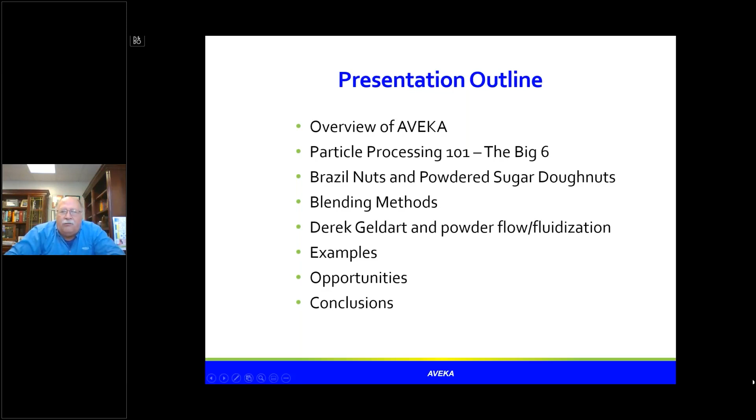So just a short overview about AVEKA. If you don't know, we are a particle technology company focused on contract manufacturing. We spun off from 3M in 1994, and we are comprised of 5 separate companies with 290 employees, and we do just about anything from food to chemicals to cosmetics and lots of stuff in between and beyond.

Since we are a particle processing company, we are always focused on different ways of doing particle processing and understanding particle processing. And I call these the big six. There's probably a big 36, but just for this talk, things that we all are interested in in particle processing range anywhere from how do we characterize it to how do we agglomerate something to how we do size reduction. But today, I'm going to be focusing on the blending part of the big six.

And if you look at the pictures that I have there, one of the pictures is a picture of gunpowder up in the upper left-hand corner. And that's clearly a blending process, but it's also a blending and an agglomeration process. So something as simple or perhaps as complicated as gunpowder uses blending to get the final product, and without the blending you wouldn't have a product at all.

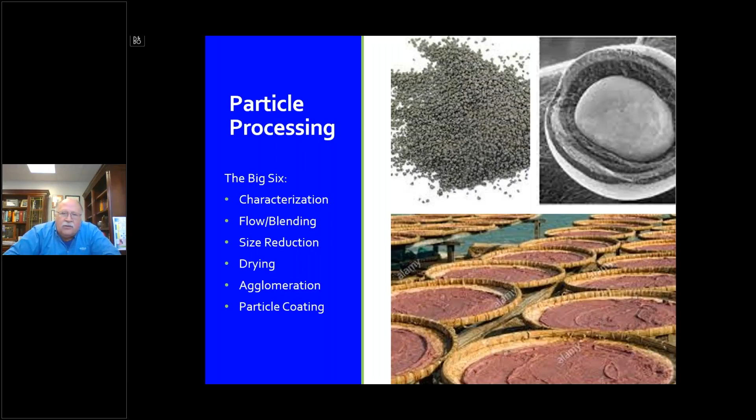Now, this is quite surprising because your first intuition would say that that big particle would sink to the bottom, at least if the density and the like was the same in fluids as it is in particles. But in fact, we can go to a lot of trouble to blend particles together, and after we've blended them and they're moved across the country or used in your factory, you can actually have your good blending process fall apart, and you can end up with those big particles on top. And so one of the issues that we're always thinking about when we're blending is how to avoid this Brazil nut effect.

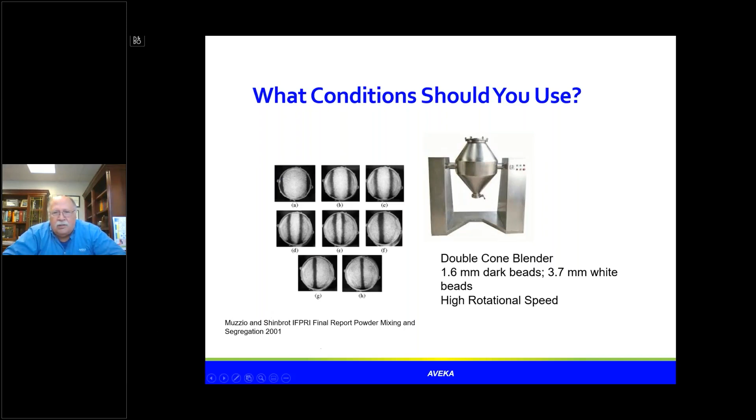His paper dealt with a lot of why this happened and the theory and the calculations. But for us that are practitioners, the important part is just that this can actually happen. So changing the blending conditions can be an incredible factor on this. I'm not going to give you all the answers today. I'm probably hardly going to give you any answers today, but being aware that you can change your conditions, whether it's the rotational speed or the type of blender that you have or the type of materials or the time or the intensity, all can make a big effect. And we need to actually pay attention to this as we're going through and doing blending.

And I'm actually going to show you one example where one of the challenges was we had a blending process that ended up with a lot of microbial growth. It wasn't with a bread sample, and I swear to God, if you ever see bread that's turning blue, run away from it. But this idea that things can happen in there that you wouldn't think about is always important to be thinking about.

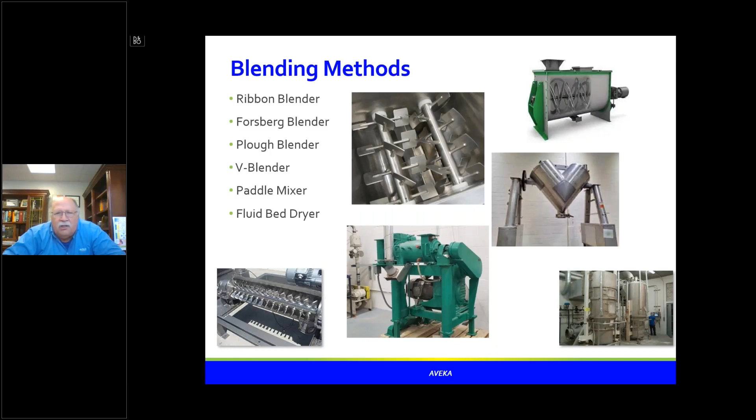This is an example of a plow mixer, where instead of having ribbons in here, you have plows that move the material around. Here's an example of a paddle mixer. And I've even put a fluid bed coater dryer in here as a mixer, because I'll actually show you an example later on. And these are great methods for doing blending. There's tons and tons of others. Let me give you a few of these others, because these would be what I would call really different blenders. And we'll talk about some of these later on.

So this is a picture of a spray dryer, and here at AVEKA, there's many times that if we can dissolve materials together and spray them out, that's a great way of doing blending, because we're now calling on solution blending. It's a way of ending up with a dry powder blend, just a slightly different way. I'm going to talk a little bit about a magnetically assisted blending process that I was involved in inventing when I was at 3M many years ago.

Those of you might recognize the Resodyn acoustic blending system from a lab standpoint. These are incredibly great mixers. This is an example of a centrifugal mixer. Commercially, it's called a FlackTek here in the United States. This is one of the better mixers for a lab mixer I've ever seen, and we'll talk about this a little bit at the end. Here's a tumble mixer where it actually has a spray bar in there. So basically almost like a clothes dryer where the particles are tumbling, and you can spray, or you can just use it as a mix.

And you know, to show you that for somebody like me who's been in this business for almost 36 years of doing particle processing in one way or the other, even an old dog can learn new tricks. And as I was getting prepared for this talk, I found this funnel mixing setup that I actually have listed as one of our examples. And we'll go through here how 3 simple funnels can be a great way for blending.

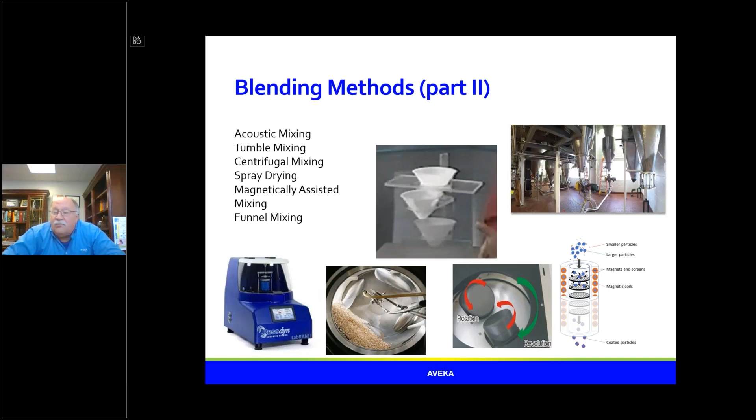And once again, I've given you some examples here of blending methods. What I haven't given you is the universe of blending, and I'm not even sure where you would go and find that. Some of the ways you just are going to have to take a look yourself, but these are some great starts. But the question that always comes up is, what blender is the best blender? What blender is the correct blender? A friend of mine that's part of IFPRI, Jeff Hoffman at Paul O. Abbe, has put together a list, and he's got a much more extensive list than what I've taken here.

So the answer is you can probably use all of these for low density blending, but you sure as heck wouldn't try to put metals into a ribbon blender, because you'd probably break it. I mean, they just don't move. The other thing that Jeff talks about is, so you've got a blender. How can you get the maximum capacity out of a blending? Because at the end of the day, you want to get it in, you want to get it out, you want to get it mixed, and you want to get on.

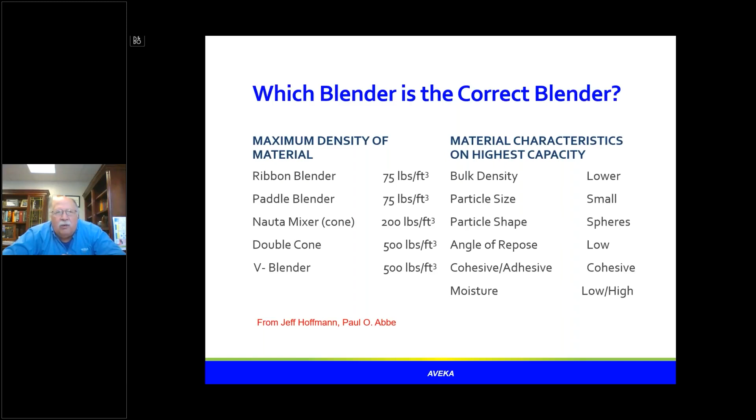Now, picking that blender, having that opportunity to pick that blender, that's usually something that we all have the opportunity to do when we're building a brand new facility. But most of us are faced with the processing dilemmas of what do you have? So I call this the available equipment dilemma. If what you have in your lab or what you have in your production plant is a ribbon blender, guess what? That's the best blender that you can possibly use because it's going to be the one that's available to you. By the same token, if you have a scalability issue and you have a ribbon blender in your lab, but you need to get to a high volume, maybe the ribbon blender isn't going to work.

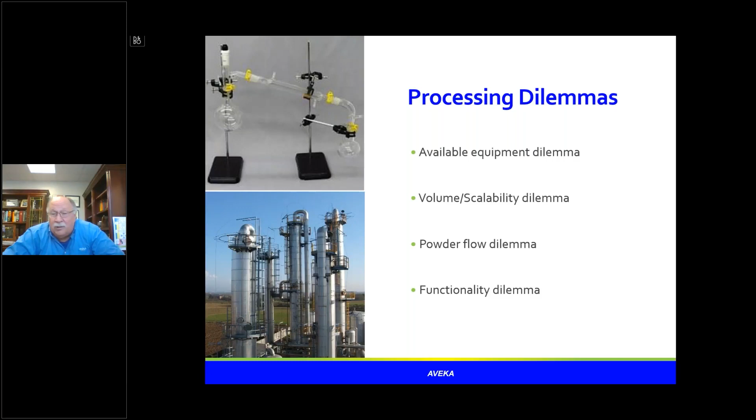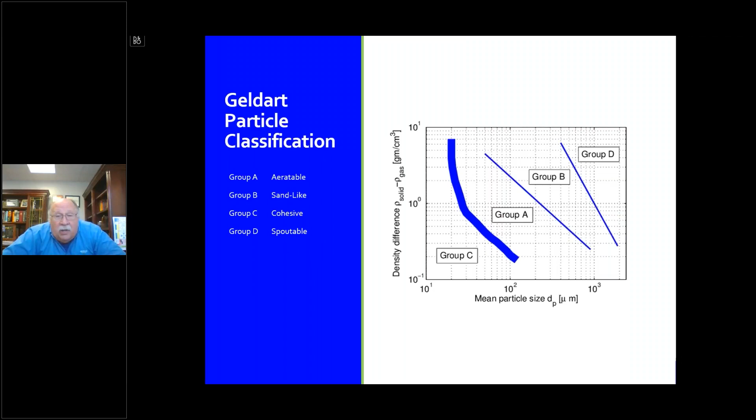The problem particles that we all worry about are group C particles, and this is an area that we're almost all working on. The particles that seem to flow the best are these group A and group B particles, and then group D particles, they're just big particles that sometimes can have challenges in moving because they're so big. But you will need to know whether you are working in that cohesive range or you're working in that granular range, and are they flowable, because it will have a tremendous effect on how well your blending actually goes. So blah, blah, blah. Let's actually look at the examples and see what we've found out about particle processing.

What I'm going to talk today about from the example standpoint is I'm going to talk about the standard blendings, and these are pretty boring, but they're interesting to talk about from a why did we pick what we picked. I'm going to talk about a blending gone way bad and why it went way bad. I'm going to talk about some clever and unique solutions. Not all of these are things that we've done here. A couple of them, the trituration and the funnel flow, these are examples from other people, but most of them are things that we've done here. What I'm going to do in each one of these examples is I want to talk about what is it that we are trying to do?

What is it that we need? How did we approach the problem? And why did we pick a particular blending method? Once again, this is not going to be an extensive list of every problem and way to approach a problem, but it's going to give all of us some ideas of what might be the best way to consider blending and how to approach it.

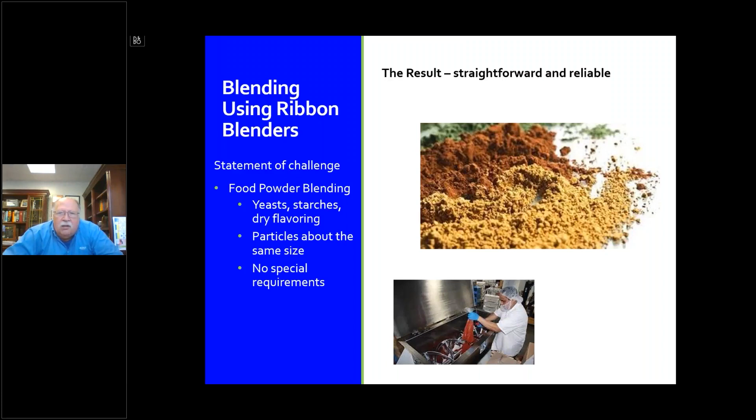I don't have a micronutrient in there. I don't have to add water. I'm just going to put it in. And in fact, the picture down here at the bottom shows somebody just standing over the blender, emptying a bag of powder into this ribbon blender, and he's going to put 4 or 5 more powders in there, and he's going to actually get a blend. Turn this on. The challenges on this thing are it's pretty straightforward.

We pick a time that might be anywhere from 5 minutes of blending to 20 minutes of blending. This is a pretty standard process for food materials at AVEKA. It's easy. We also do industrial materials, but in this example here, I'm just talking about food materials. The reality is that the biggest issues that we have on using these types of materials is getting the product into the system without making a dusty mess and making sure that the formulation is right.

And not because the formulation hasn't been designed to be right, but when you're taking lots of different materials, the reality of this is it's a mess because of how I'm putting it in, and did I get everything in there? Now, I would like to say that no one that's ever done blending in a manufacturing process has ever made a mistake in the formulation, but I think we know that that's wrong because it does happen. And no one has ever had a problem getting particles into a process without making a mess. And that would be wrong also.

We use some bag dump stations, and I think these are pretty standard. So, you can pick just about any blending process, but you're going to have to get that powder in and you're going to have to get it out. Typically, these aren't big problems. And if you have the right equipment and you really set up your formulation system right, I mean, this is protocol and process, it should be actually fairly easy for you.

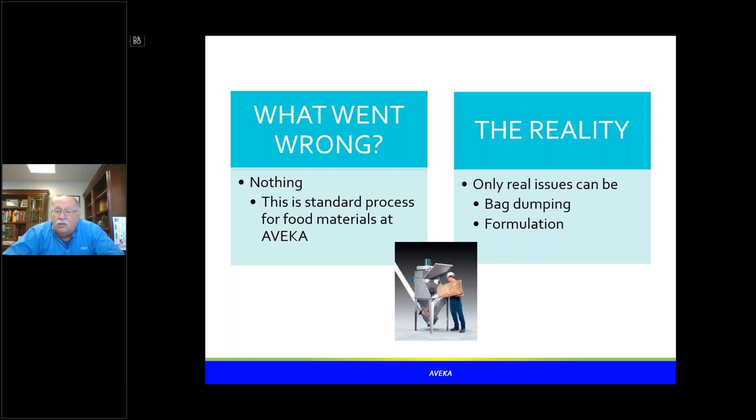So what happens is these paddles here are moving rapidly. You've got 2 sets of paddles. They intermesh very nicely. And if this is a continuous process, this is actually a batch process shown, the powder comes in at this end and the powder is moved down to this other end, and the powder leaves from the bottom in a continuous fashion. This is a type of process where you're going to set up on a big scale, 5,000 to 10,000 pounds. I mean, you can really get some large volumes through here. We love this process. This is a great process if you're doing big volumes.

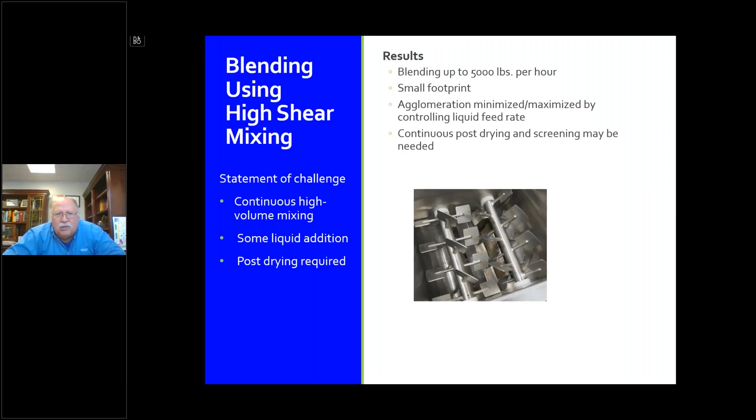Typically, a good example where something like this might be used is in the formation of granulated soap powders. This system will also do some agglomeration, but there's big volumes that have to have the right cost, and so we don't have time for loading up systems and unloading systems. It needs to be continuous. What went wrong with this system for us? We actually put this system in our plant and it works fine. We didn't have anything wrong, but just like the other process, we really have to be careful about how we're adding the materials, how we're handling before and after.

And if we are mixing with agglomeration, many times the yield might be only 60%. So there's a recirculation mode. Now that's not typically what we think about in blending, but if you start mixing blending and agglomeration and drying, you can actually have some issues where you're going to need to recirculate your materials and make sure you get everything done right. The third relatively easy process that we looked at was blending of a very dense material. It was a ceramic material.

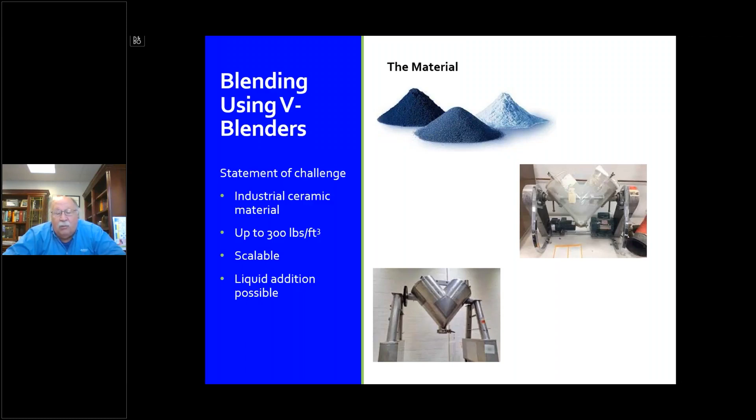Well, what went wrong? What can go wrong in a system like this? We have seen some cross contamination issues, and we've seen premature dumping issues. So once again, let's go back and take a look at this picture here. You're loading the product up here on the top, and typically you're unloading it at the bottom. There have been times that people haven't actually closed the bottom, and will end up dumping the material all over the place. That's a bad day for everybody.

How do we solve the issues? Because the blending is absolutely straightforward. It's really quite nice. How do we solve the issues? It's all about protocol training and PM maintenance. But that's just standard manufacturing operating procedures for everybody.

I think that this next example, blending gone bad, is really a unique and interesting story. So let's do the statement of the challenge here. I wanted to add a small amount of water to a dry food product. Now, I want to go from less than 1% up to 5% moisture. I'm going to use a ribbon blender. I'm going to use a spray atomization. I'm just showing here a ribbon blender, but we could have easily used a tumble coater because I wanted to show the spray atomization.

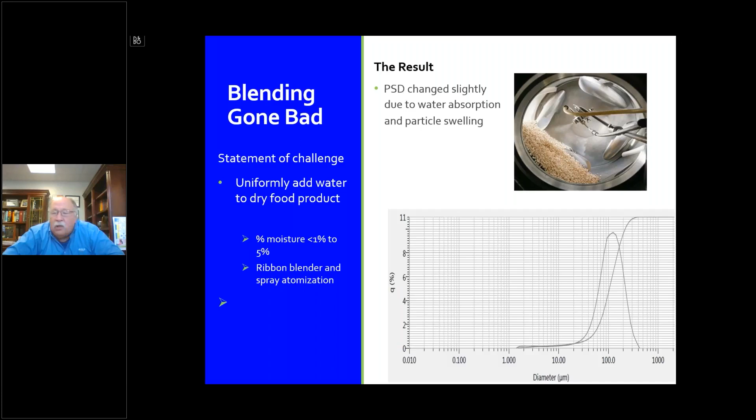The result is it worked out really well. The PSD changed slightly, just showing a particle size distribution. There apparently was just a little bit of water, the swelling of the particles. And as far as we could tell, we hit a home run the first time we ran this product. It worked perfectly, except what went wrong. So two parts to this one. The blending was easy. It was straightforward. The problem was everything went wrong. There was incredible microgrowth afterwards.

Now, if you're in the food business, you know that 5% moisture is not a bad thing to have. 5% moisture, you shouldn't have microgrowth. And in order for you to have microgrowth, you typically need three things. You need food. Well, we're working with food. You need water, which we just added to food, and you need a source of the microbes. Now, we didn't add enough water to cause a problem, and yet we had this problem.

So the first thing that we knew is that there had to be microbes either in the system to start with or added in the water. And we were actually able to easily prove that the water wasn't the problem. So the microbes must have been there, but they weren't growing at the low percent moisture. The question is why did they grow when we were still below what would be a reasonable number for moisture in the system? We believe, and this is probably absolutely true, the water wasn't uniformly distributed. There were wet spots that were higher than 5% moisture, but overall the sample was 5% moisture.

Now let's think about this. This is the classic issue in blending: is your product uniform when it comes out?

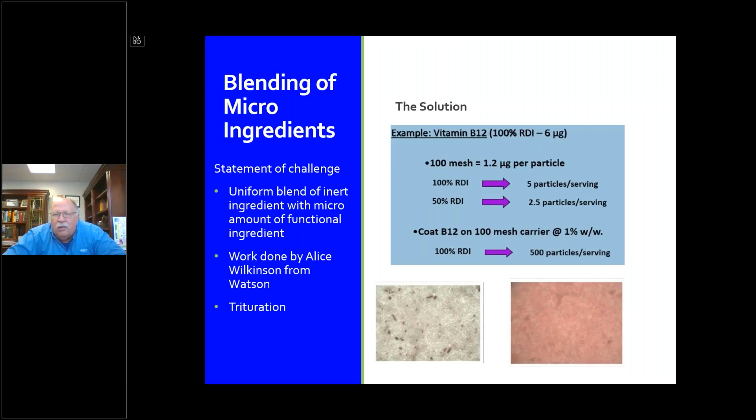So what Alice did, and I think this was brilliant, is what's called trituration. She actually dissolved the vitamin B12 and sprayed it on the surface, and you can see the difference between this nonuniform and this uniform blend. And this was done by a fluid bed or a spray drying process.

I consider that in this case, Watson and Alice Wilkinson came up with an incredibly brilliant solution to blending uniformity. They sidestepped this mixing challenge of micro ingredients by dissolving it and actually spreading it out and then drying the product. I don't know, is that cheating or is that brilliant? I would truly consider this brilliant.

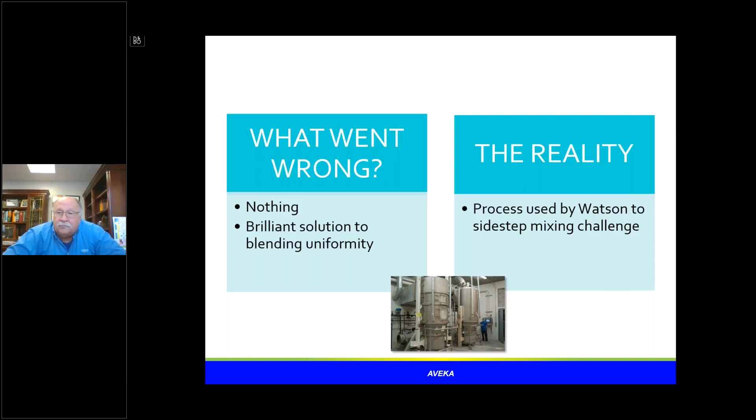Let's consider another challenge people have. If the particles are the same size, like the original ones that I showed back there that were monodispersed, blending isn't needed. But when you're trying to blend large particles with small particles, you start getting into this Brazil nut effect or the powdered donut effect. And so we had a question that was asked many years ago about putting fumed silica onto powders to improve flow.

The process needed to be continuous, and it needed to be stable. And why did it need to be stable in this mixing? So we didn't have all the flow aid fall to the bottom of the bag like the powdered sugar does. The way that we approached this problem, and this was a problem we were working on when I was at 3M actually, is we came up with a completely different mixing method that we call magnetically assisted impact coating. And we're going to measure the process on flow, and we're going to look at some mechanism here.

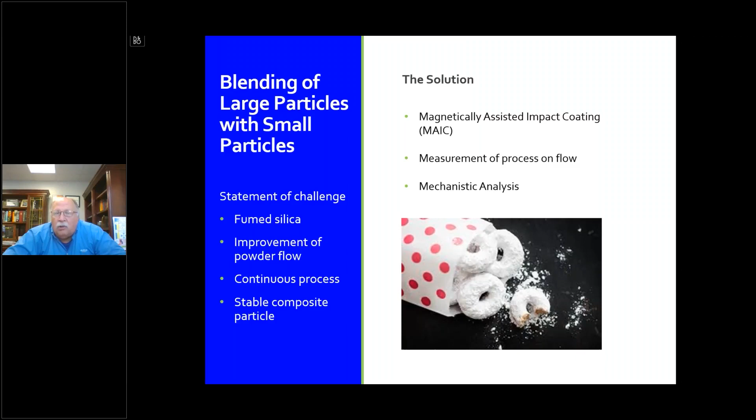But let's take a look at what this process actually is. So this is a continuous process where we have a tube. This is like a plug flow reactor that's nested in a magnetic field that we apply an alternating current on, which produces an oscillating magnetic field. We set a number of screens in this system, and on top of the screens, we put permanent magnets.

The magnets are sized so they don't go through the screens, but the small particle and large particle that we're actually putting into the system will go through the system. When we turn on the magnetic field, the magnets oscillate. They look like Mexican jumping beans on speed, and they literally pound the small particle onto the large particle, kind of like the micro concept of powdered sugar donuts. And we come up with this coated stable particle, as you can see at the bottom here.

We compared this mixing method to the standard mixing method of V-Blender, and then we measured the flowability of this ensemble using FT4 from Freeman Technology powder rheometer. So the results that we got are shown here. This is an example of starch particles that were coated with fumed silica, and what you can see is the fumed silica decorates that starch particle, dramatically improves the flowability.

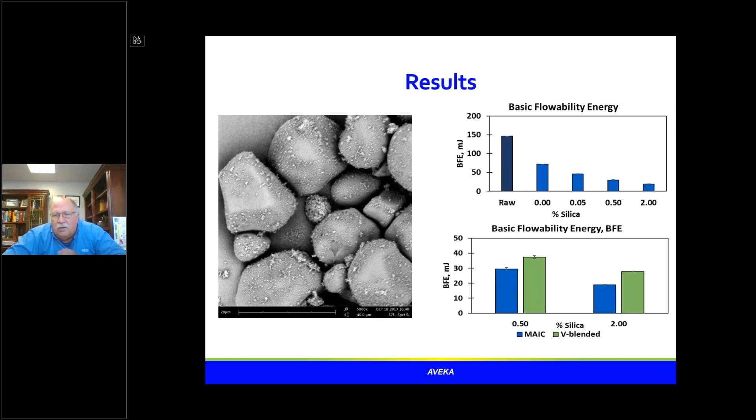So two different mixing methods. They give different structures. One has this coated structure, and one has the loose powder in there. Basically, what we found out using this MAIC process is what went wrong? Nothing went wrong. In fact, this was an incredibly consistent process to get the same basic flowability energy almost every time that we did it. We actually put this process in production about 2 years after we started AVEKA, and we have been in production with this process for 25 years to come up with this better flowable product.

Now, this is an interesting way of adding that small amount of material at disparate particle sizes and getting a consistent mixing that really can give you a unique and interesting product. But one of the things that we were asked almost immediately, and this is about 25 years ago, was how do I blend a small amount of liquid with powders? And this is the first example that we had of this, when somebody asked us to put less than 1% liquid on a submicron particle and develop a continuous process.

Now, the challenge with this is, if I were to give each of you a cup of flour and take an eyedropper and put 1 drop of water into there, and I let you go back to your labs and mix that up, my question to you is, how long is it going to take you to uniformly mix that liquid water into that 1 cup of flour? And to uniformly blend it, I would assert that the answer is an incredibly long time. And in fact, you might not be able to do it. And the reason is what's called a Pickering emulsion.

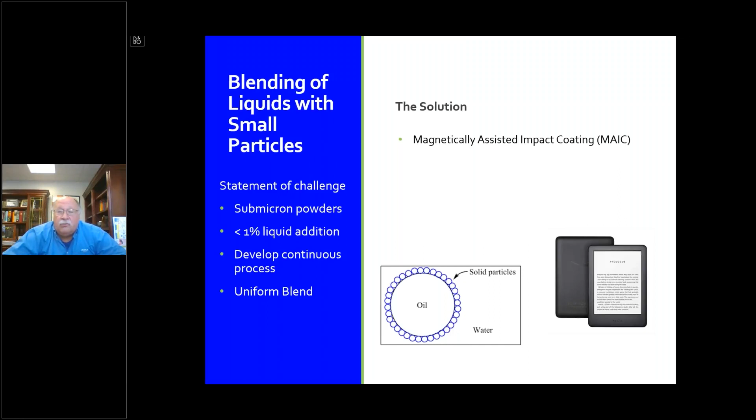Once again, it's back to that same process of, instead of smaller particles and larger particles, it's larger particles and a small amount of liquid. This magnetic system here with all the magnets in here operating at 3,600 RPM does a great job of distributing that liquid. It doesn't work as well with a V blender. In fact, it's terrible.

Our measurement method in this case isn't a flow system, but we actually use thermogravimetric analysis to analyze the sample. And unlike the flow system, that functional property is a macroscopic property. And when we're measuring with a TGA analysis to see how much liquid we put on there, we really don't know how well it is. I mean, this is one of the real challenges, is how uniform on a microscopic level is your mixing. We believe it is very, very uniform, but I don't really have the data to back it up.

What went wrong? Nothing. The process, once again, just like the powder on powder, is extremely consistent. We get great results, and we've actually been in production for 17 years making this small amount of liquid dispersed on a high surface area material, and it works wonderful.

So my last example here is mixing using funnel flow. And the statement of challenge, that we're gonna show you a little video of here in a second, is how do you mix widely separated segregated materials during mass transfer? Because what people are interested in doing is, I really don't want to have to mix every time I put it into a bin. If I can mix in a continuous way with no moving parts, wouldn't that be great? And it turns out that I don't think that this is a new to the world method, but the method that they use to do this is taking 3 offset funnels, and you can get incredible mixing.

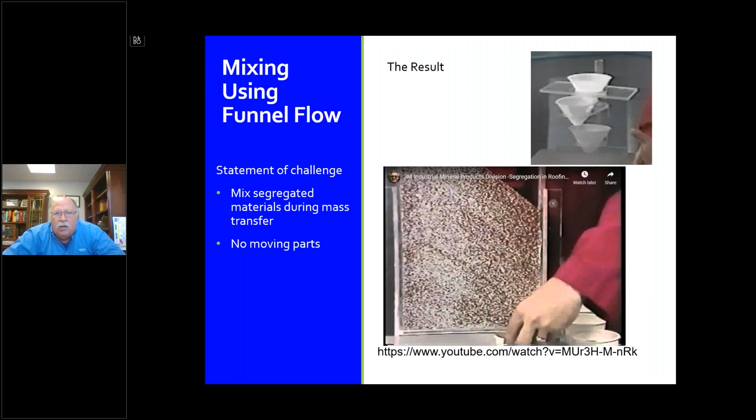So this is a video from 1990. This is a video that I hope you get a chance to watch all of, because it's very interesting. It's a video from 3M that I just found last week. I was there at 3M when they made this video, but I never saw it. And this is a way that they came up with mixing powders without any moving parts. So let me run it here, and let's get to the right section in the movie.

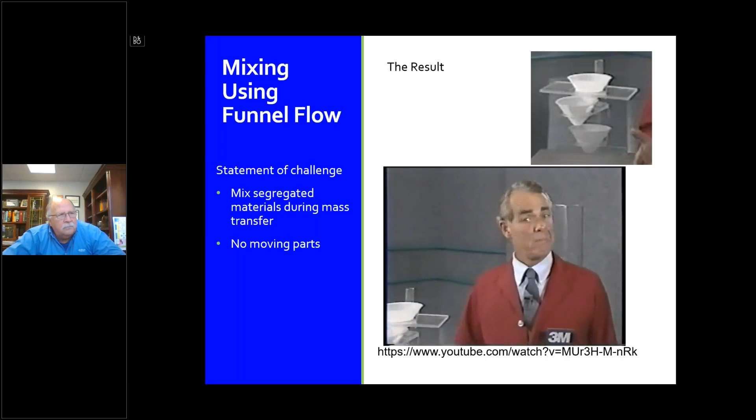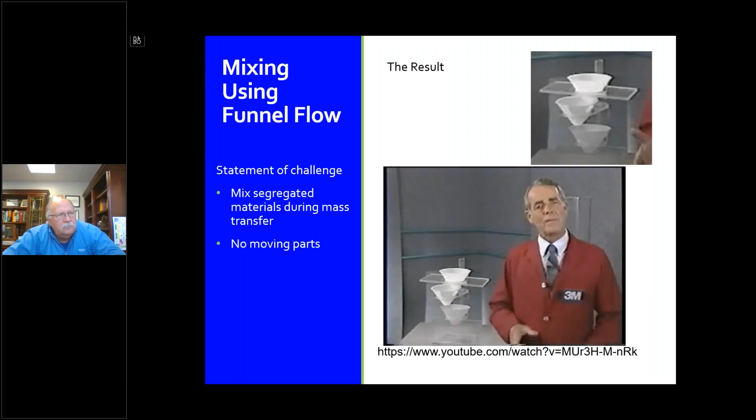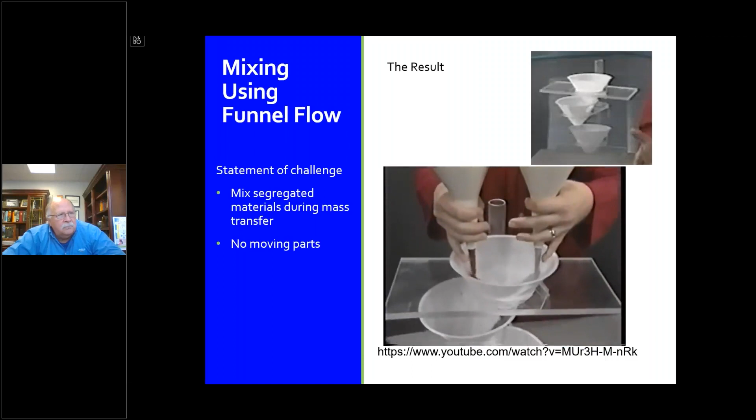Throughout these demonstrations, we've talked mostly about preventing segregation in materials that are evenly blended to start with. But what about material that starts out somewhat segregated? Is there anything you can do to remix these materials? Yes, there is. The results of this next demonstration may seem unbelievable, but there is no trickery here. These 3 sharply angled funnels are mounted offset to each other. This would be a good method of remixing material while recharging bins above the line. Watch what happens when we charge this funnel system with material that is as sharply segregated as you can get. We charge the top funnel with the red and the white granules in equal proportions. Notice at the bottom that the only segregation still remaining is that caused by the fact that we're allowing the material to form a cone. The triple funnel arrangement has effectively remixed the segregated granules.

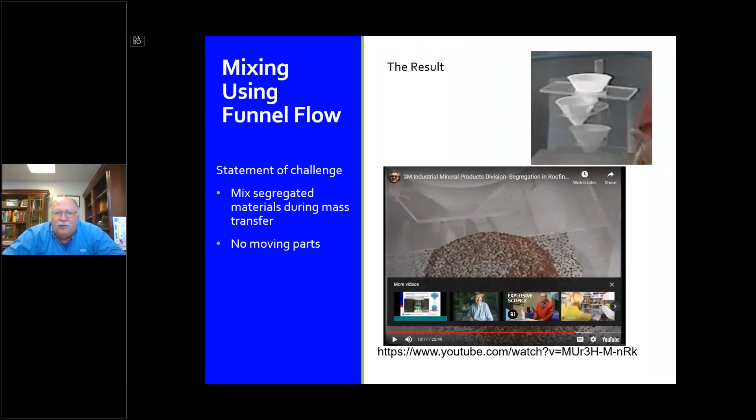So I found this very interesting. I hope you could hear the narrator talk. It's an old style video, and I call this: there's something new for every old dog to learn here, even though it might be old. What went wrong? This is an incredible mixing process. What went wrong is, I never knew about this process until this week. The reality is, I'm going to actually be putting it in some of our plants to see how well it actually works. Because if I can do mixing without any moving parts, just adding materials in random spots and getting them to mix in a relatively easy system like that, I need to try this out.

So what did I leave out? I didn't talk about the use of mixing in pharmaceuticals, which is an incredibly important area. The pharmaceutical people spend a lot of time trying to make sure that what goes to their powder compaction to make tablets is absolutely uniform. And the pharmaceutical industry spends more time on blending than probably almost anybody else.

I didn't talk about friable materials. You can't use a high shear granulator to do friable materials, but there's some opportunities for you to take a look at things. I didn't look at color control. That can be a blending process where you mix powders of different color. And I didn't talk about pastes and slurries. I mean, I talked about adding a little bit of liquid to something, but I didn't talk about pastes and slurries. I also didn't talk about batch versus continuous, other than that one discussion about the Forberg mixer.

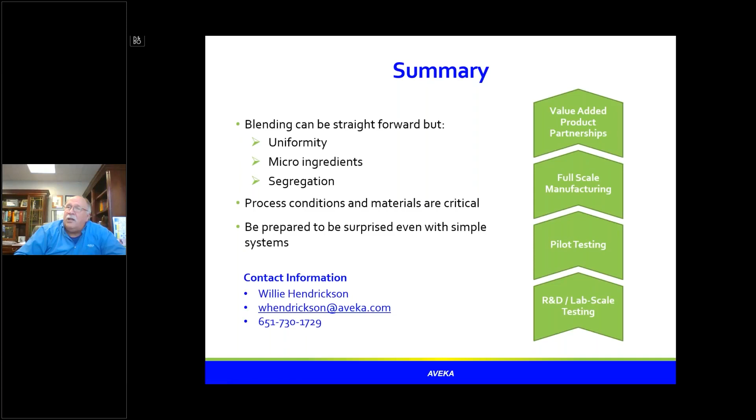Thank you very much for listening. And Julie, I'd be happy to answer any questions. So thank you so much for the excellent talk. I learned a lot, and I definitely would be interested to go back to the YouTube video and watch how they blend in such a smart but easy way.

So it seems like quite a few people are interested in micro ingredient blending. So can you comment a little bit about efficient mixing of a fraction of 0.3% of nanomaterials into microfine powders? Yeah, I would say, really a challenge with that, because when you get into both nanoparticles and microfine materials, typically they're going to have high cohesion. So the blending process is difficult just because of the cohesiveness of the powders.

And if they're not soluble, so you can use the trituration method that Alice Wilkinson had, you're really limited in how to do it. If you really have that 0.3% of a nanoparticle and a fine particle, please give me a call and let's talk about using that MAIC process. I mean, that to me is the real answer to that question. I think there are other ways you might be able to do it, but I just think that MAIC really stands out as a unique and good way of handling that.